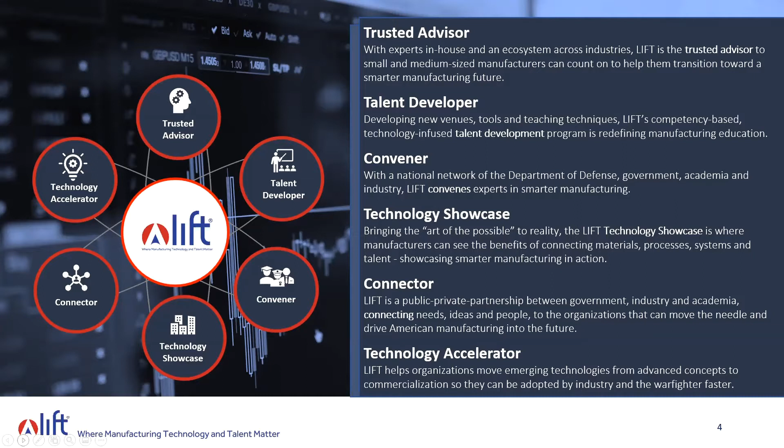We are a connector. Again, a public-private partnership between government, industry, and academia, really connecting the ideas, needs, and people to the right organization to move the needle. And finally, a technology accelerator, where we are moving emerging technologies from advanced concepts to commercialization to get them into the hands of industry and the warfighter.

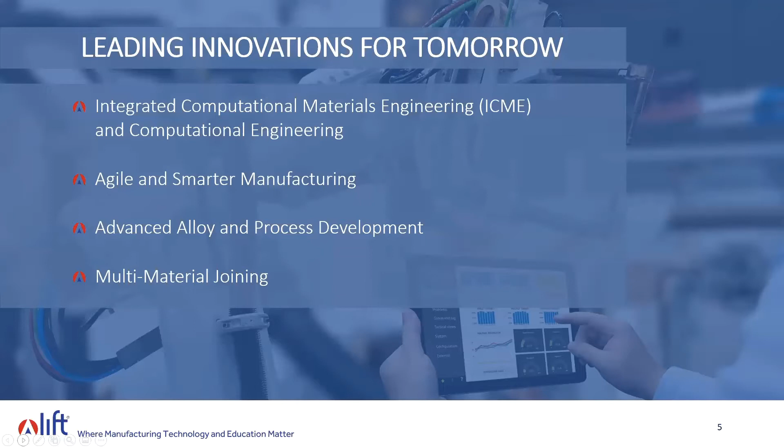A little bit deeper dive here. You can learn a little bit more about these on our website, or you can certainly reach out to us and ask any questions you might have. But really, again, it's connecting the physical to the digital as we're moving towards a smarter manufacturing future.

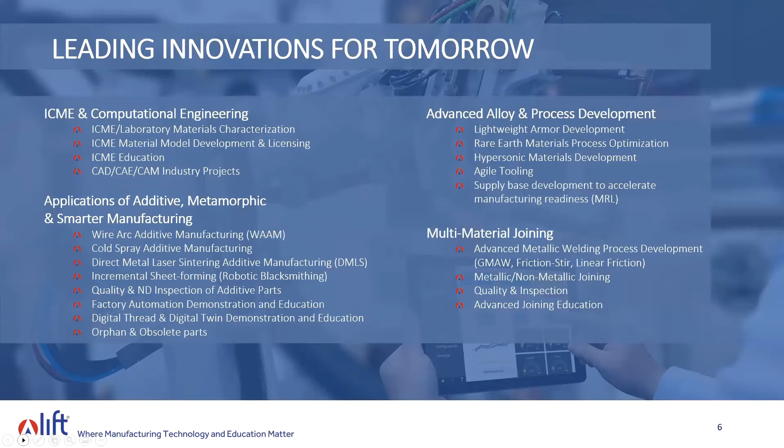The talent program, Learning Innovations for Tomorrow, has four basic pillars as well. It all starts with our Ignite Mastering Manufacturing curriculum that we developed. We teach that each and every day at the LIFT Learning Lab, where pre-pandemic we had 150 students a day going through there to learn about advanced manufacturing, learn about material science, and really expose them to the world of advanced manufacturing.

We also offer world-class certification programs for the mature student, folks that may need to learn a new skill, folks that may need to upskill to gain their next position in advanced manufacturing.

And finally, Operation Next is a program that is evolving as we speak. This was originally launched as a pilot down in Fort Campbell, Kentucky, to provide an opportunity for our servicemen and women as they leave the service. We wanted to provide them the opportunity to gain credentials in advanced manufacturing careers, so we offered them that six months before they left the service. Our goal was 101 down there. We knocked that out, and now we're expanding it across the country.

We just announced last week that the program is becoming available to the National Guard and Reserve here in Michigan and their spouses, so we're excited about having that opportunity. We're looking to announce a few more expansions, as the Department of Defense is funding that expansion to 9 additional bases across the country over the next couple of years. So we really think it's important to give back to our service members.

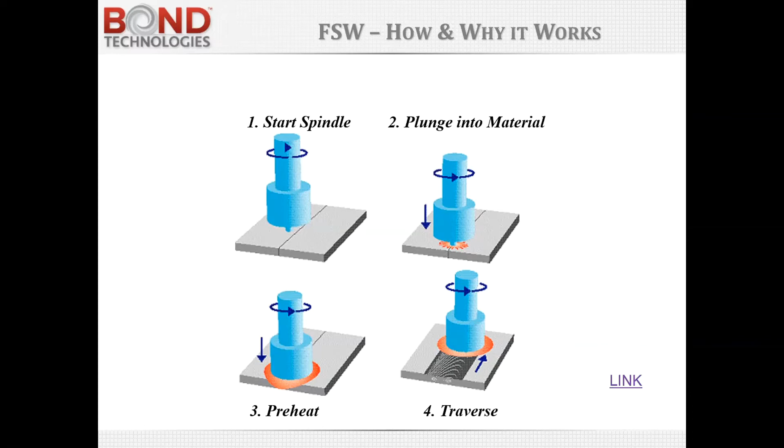But as opposed to melt phase arc welding, for example, the oxides become stirred into the material as opposed to inhibiting the weld process.

You can join a wide variety of alloys, although the predominant application for friction stir welding has been and will probably continue to be aluminum. The skill level of the operator, once the process is developed and put into production, is fairly low, so it does lend itself to production applications in manufacturing environments.

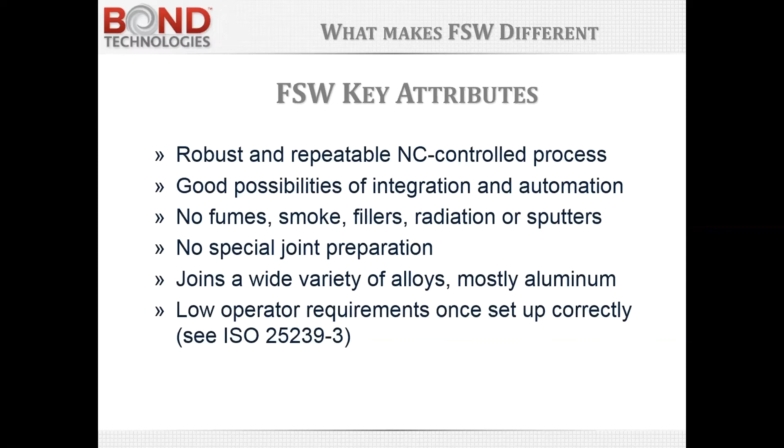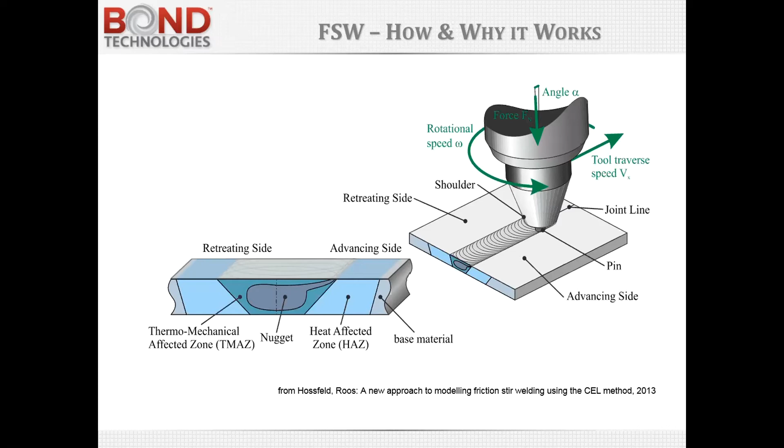The forge force is pushing down on the joint as it stirs. There's a rotational speed, there's a traverse speed, so speeds and feeds, much like metal cutting. The tool has a pin and a shoulder, and there's an advancing side and a retreating side, which is notable. So if you jump back to the picture on the lower left, you'll see a little bit of a tail on the advancing side, so it is not a perfectly symmetrical weld nugget.

The process parameters start with the pin tool geometry, and then rotational speed, traverse speed, and pin tool force are the three parameters that really affect the elevation of temperature, which then affects the flow stress of the material and results in the mixing of the material.

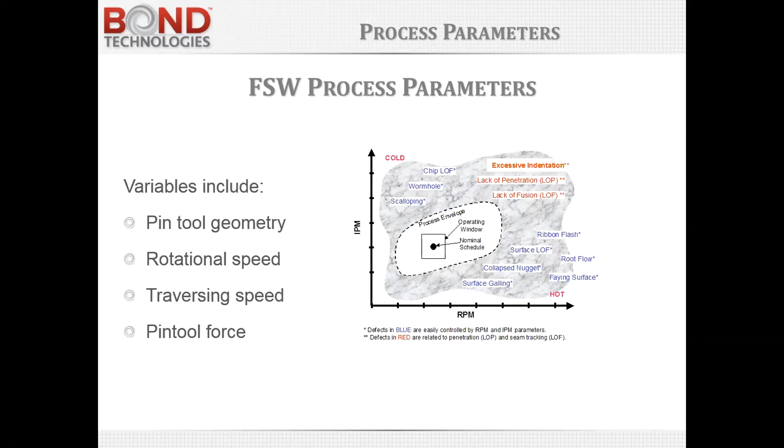One of the key aspects of friction stir welding is the use of forge force. You can do this in position control, in other words, plunging into the material, getting shoulder engagement, and traversing along the joint with a constant position. But if there's any variation in the material thickness or the tooling, it can result in a variation in the engagement of the shoulder. This will affect the weld process.

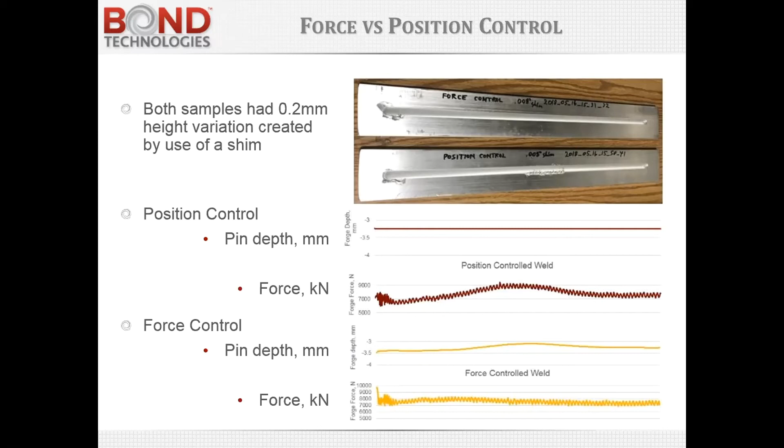So to do friction stir welding, it is advisable to use force control and use load sensors to be able to measure and close that loop.

Many kinds of materials, mostly metals, are welded with friction stir welding, but as I said before, it's typically used for aluminum. There are dissimilar materials that can be joined: aluminum 2000 series to 7000 series, for example, or aluminum to copper, aluminum to magnesium. I'll show you an example of aluminum to steel. Steel welding can be done.

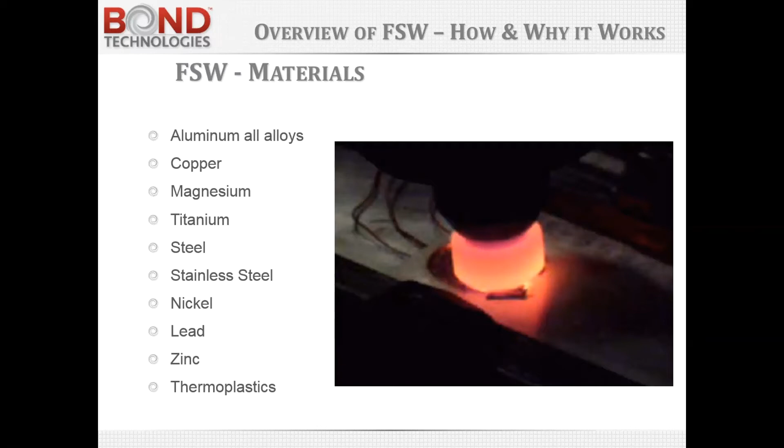Even people, the rumor has it, have welded chocolate together. I'd like to see that sometime.

Joint geometries are shown in this slide that are kind of popular. Some joints work better than others, but one of the things to be careful of is because of the high forge force and the high level of plasticity of the material, when a joint geometry is chosen, there needs to be very good support underneath.

Let's take a look, for example, at joint J, which is a kind of T-section. If the weld nugget were too large, you could imagine plasticized material causing a loss of containment underneath the flat horizontal plate. So in an example like this, one would use tooling to support that inside corner to avoid the plasticized material extruding down and out.

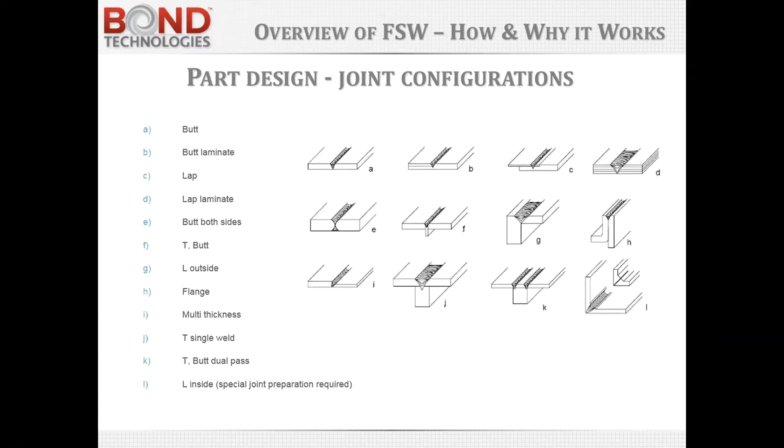The tool that does the work has a lot of characteristics and is actually somewhat complex, because it's not only forging the material down, but also inducing a horizontal and a vertical component. This big picture is of a conventional tool.

It's a one-piece tool, so the pin and the shoulder are made of the same material. Typically these are tool steels, starting with something like H13 and going up to some high nickel cobalt alloys like MP159 or the Nimonic series of materials. The pin tool takes a lot of abuse, so it has to be made of a very good material in order to last a long time.

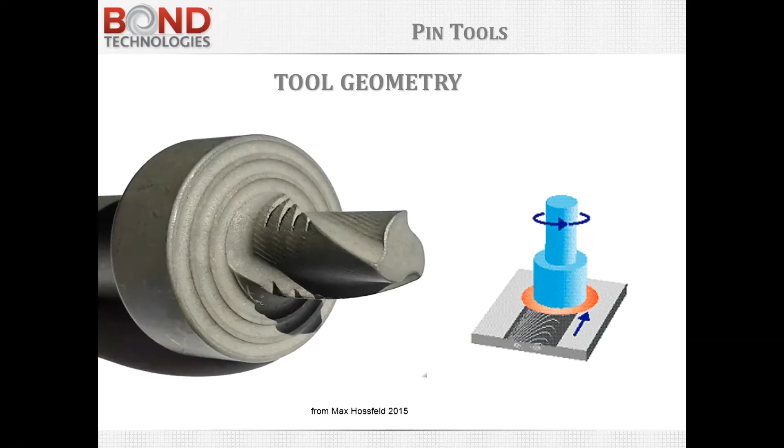Not only are some tools fixed pin, but there are some variations on the pin tool design. The fixed pin is shown to the left. These can come in a one-piece or a two-piece configuration. We make tools that have the pin as a separate component with a backing screw so that you can change the pin length depending on the material thickness.

The pins shown in the middle have two pieces, but the pin axis and the shoulder axis are actually separate. One benefit is that when you finish a weld, the pin can gradually retract over the last several millimeters to eliminate the exit hole that may be present with a fixed pin. The downside is it requires an additional axis, the equipment cost can go up, and it's a little specialized.

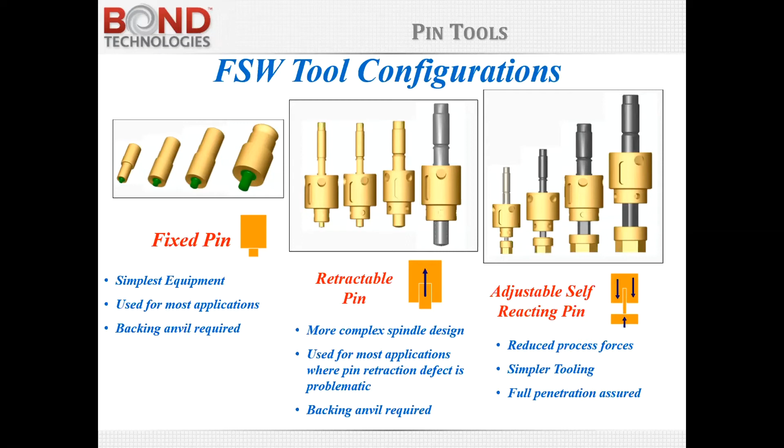But if you have an additional axis, you can also do the pin configuration on the right, which is an adjustable self-reacting pin. One of the big benefits of this pin geometry is that the forge force is reacted not by the tooling that supports the part as much as by the opposing shoulder. So for launch vehicles, for example, welding a large barrel where it's very difficult to introduce an internal mandrel, this has found its way into welding tanks for rocket ships.

This chart shows some typical aluminum alloys and the joint efficiency, which is the ratio of the stir welded joint strength to the parent metal. You'll notice that the 5083 O temper really doesn't lose much ultimate tensile strength after welding, because it starts at an O temper and winds up at an O temper. Others, like the 2000 series materials, have quite a range. And 6061 T6, a very common friction stir welding aluminum alloy, has a joint efficiency of around 67% or so.

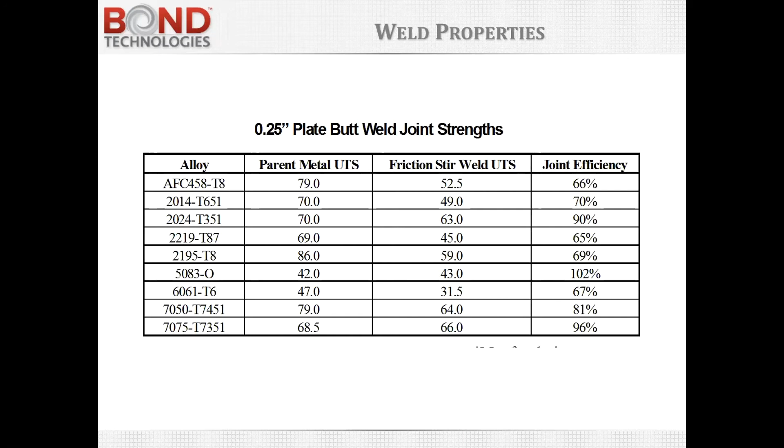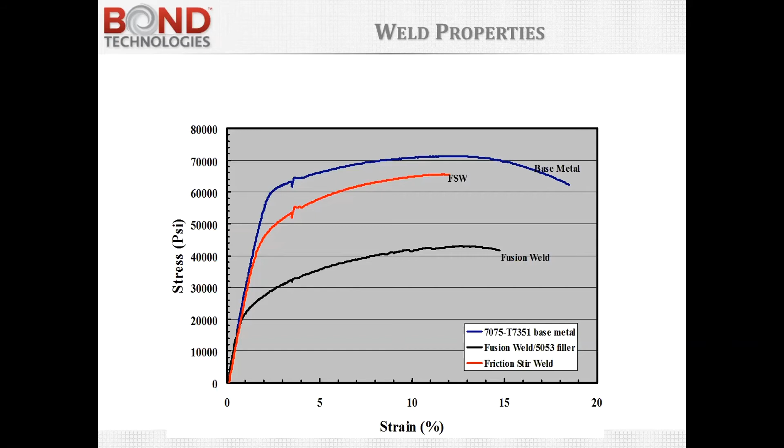This chart compares stress strain curves for fusion welding and friction stir welding for the base metal. In this example it's a 7000 series T7351 material. But in most cases, like 7075, a stir welded joint does have superior joint strength to a fusion welded joint. In fatigue, friction stir welding also demonstrates superior performance to other welding methods.

So the benefit from an application perspective is that, if the welded joint is the weakest link in the structure, friction stir welding gives you the ability to reduce the thickness of the material and allows you to lightweight the product.

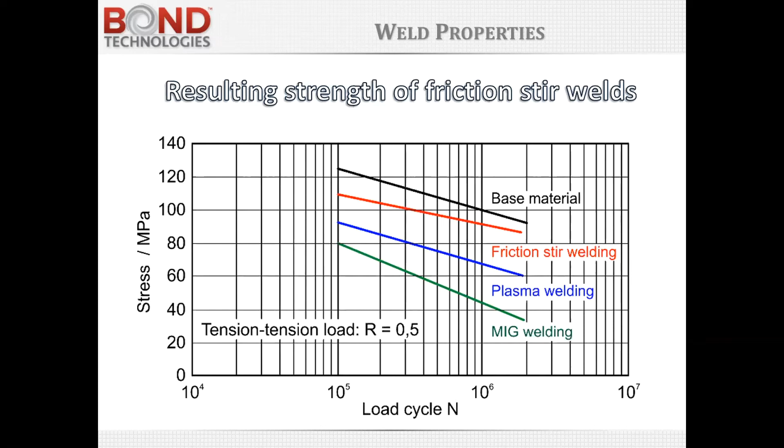This has found its way into all kinds of industries. Some have been around since the early days of friction stir welding, some are emerging. I'm going to go into a number of examples and comment on how stir welding has impacted these particular applications. But first, I want to give you an insight from Bond's perspective, the kind of inquiries we are receiving, to give you a feel of what activity is going on. This technology is still migrating from the research and development world into the production world. There's a tremendous amount of R&D activity still occurring in universities, national labs, and private industry. If you look at automotive and R&D, for example, that constitutes about half of the inquiries we currently receive.

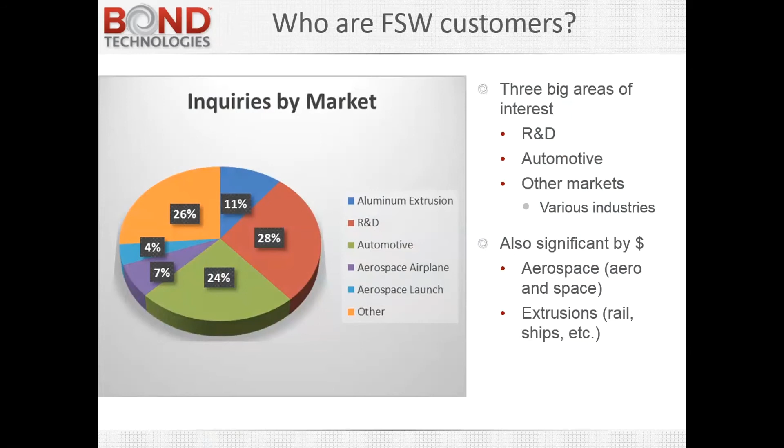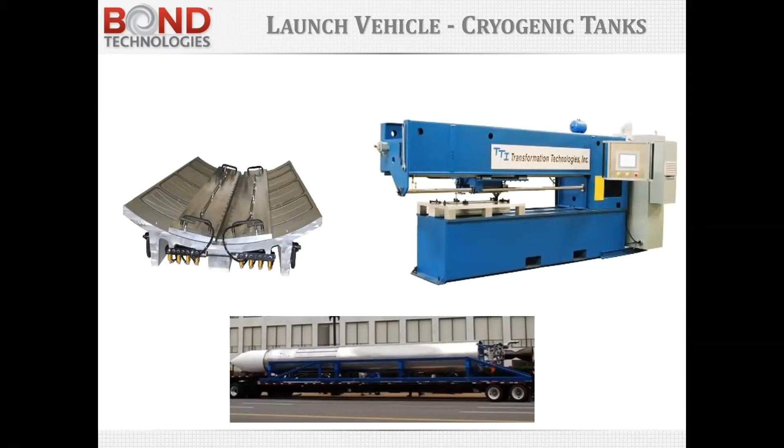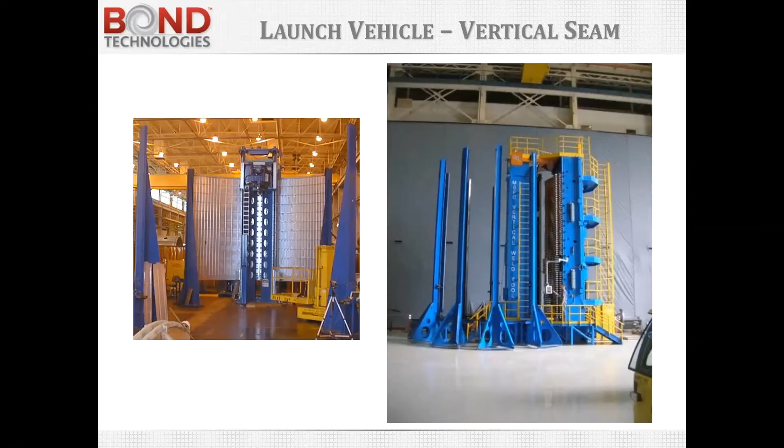Here's an example of a launch vehicle application. In this case it's a linear seam weld used to make a tank. This machine is at Marshall Space Flight Center making tanks. To the left you see the ortho grid or iso grid, they do both in tank sections. This takes segments and turns them into barrels.

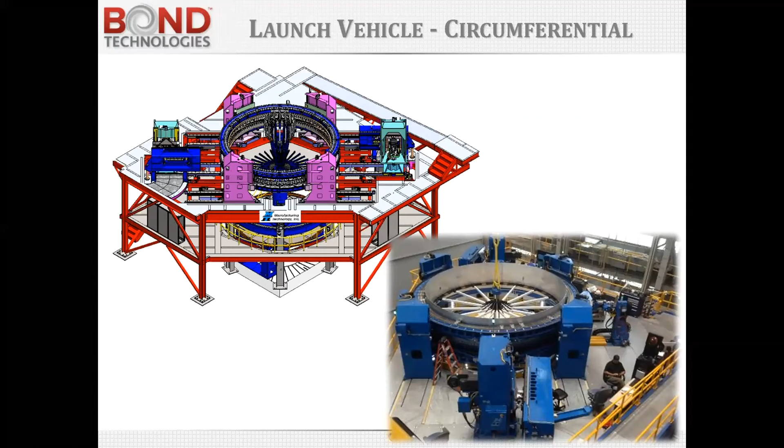Once you have a barrel, you can weld barrel to barrel or barrel to dome with a circumferential weld. This is a great application for that self-reacting tool that does not require an internal mandrel, although this machine does have an 18-foot diameter umbrella, essentially, that expands to support the weld so that they can also do conventional welding.

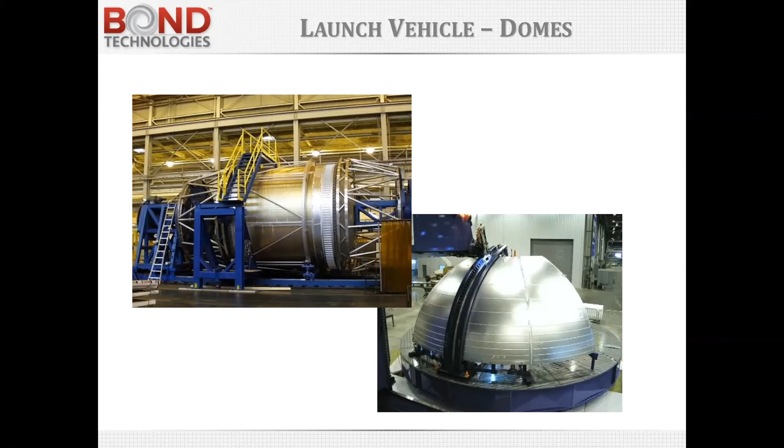One thing about the rocket ship people is they realized early on that aluminum lithium alloys have a great strength to weight ratio, making them great candidates for rockets, but they're also very difficult to weld using conventional methods. So they discovered friction stir welding was a really good applicable technology for making rocket tanks. As a result, a tremendous amount of innovation and R&D has occurred by NASA, SpaceX, Boeing, ULA, and overseas by ESA and others who have broadly adopted friction stir welding.

One of the early adopters was Eclipse Aviation for construction of fuselages without rivets. If you get on an airplane these days, there's a lot of rivets. Interestingly, in the airplane side of the aerospace industry, it's very difficult to change a manufacturing process to adopt a new technology. So where you see friction stir welding finding its way into the airplane business is primarily on new designs.

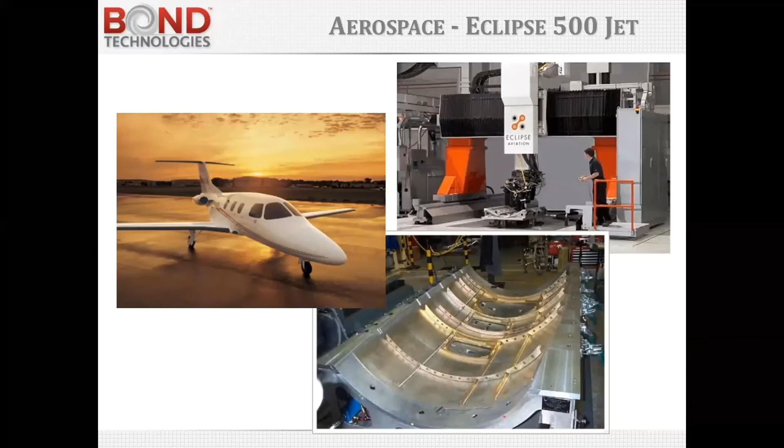Shipbuilding was another early adopter. The ability to join extrusions together to form ship decks is a very common application. One challenge is managing the straightness of these joints, because if the stir weld gets off joint, you're going to have a very weak structure. So keeping these straight, clamping them properly, and tracking the seam to follow properly are some of the technologies developed to address long panel extrusions, including in the shipbuilding industry.

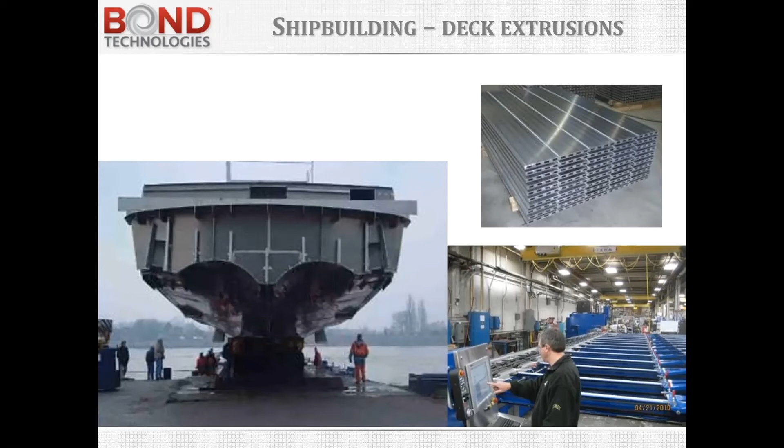Steel has also been done. One challenge with steel that is seeing some traction now is the development of a robust pin tool that can live for a long time in steel - it's a pretty tough environment. Typically, the tools used for welding steel are polycrystalline cubic boron nitride, PCBN, or tungsten alloys like tungsten rhenium or lanthanated tungsten. Pretty expensive stuff, so minimizing the wear characteristics of those tools is an area of continued development in friction stir welding of steel.

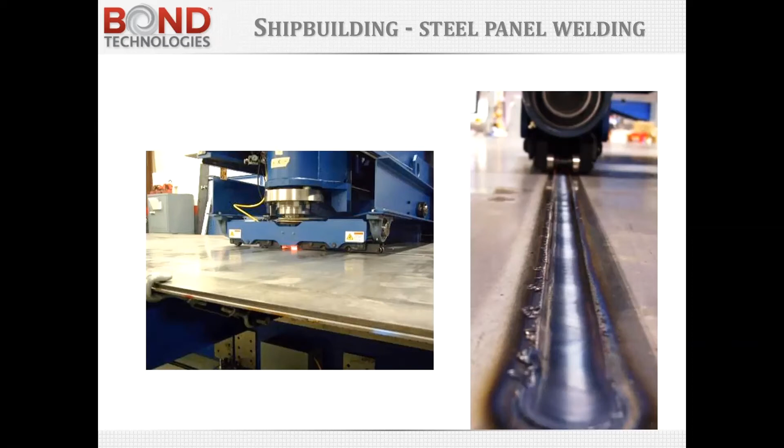You can use robots for friction stir welding, and for thinner gauge materials it's a suitable application. Robots are basically a commodity - you can buy them and they're treated as a component. So you put a spindle on a robot and you can do friction stir welding. However, even with the advent of deflection compensation at each joint, robots still struggle to be stiff enough dynamically. Statically you can compensate if going in a straight line, but there are challenges in getting a robot stiff enough. So there are production applications where robots are used with an FSW spindle, but it's primarily for thinner gauge materials.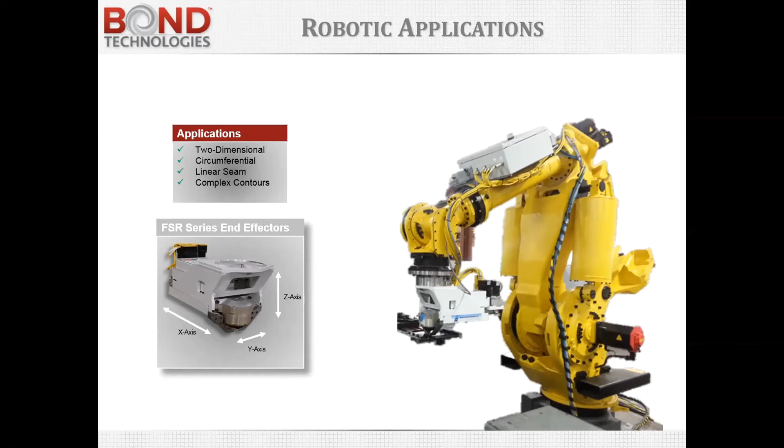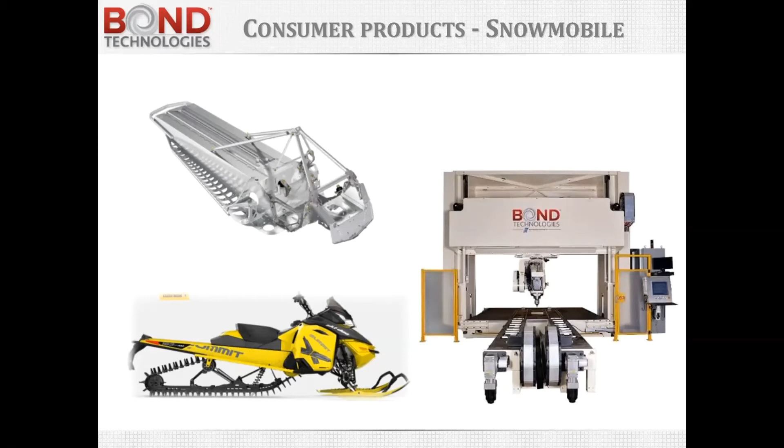This is an interesting application that uses a multi-axis machine for complex contours. One challenge of complex contours is finding a path that manages the force and accommodates variability in machine deflection as it goes through the weld path. But this application allowed the manufacturer of this snowmobile to reduce the weight, reduce the center of gravity, and increase the reliability of the component they welded. So they looked at friction stir welding not just as a cost savings and substitute for a traditional method, but as an opportunity to improve their product design.

I think this is a cool application - it's a connector for a power transmission manufacturer. A couple of interesting things about this: one is that it did use a retractable pin to avoid an extraction defect in the weld. The other is that one of the quality control metrics for assuring the weld was done properly is the measurement of the resistance across the weld joint in micro ohms.

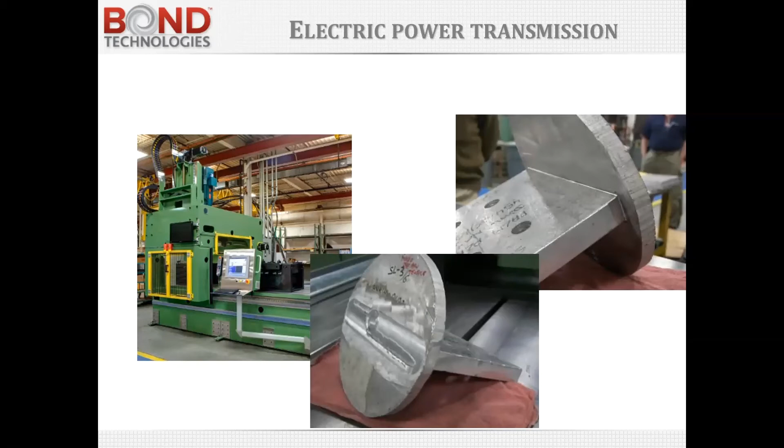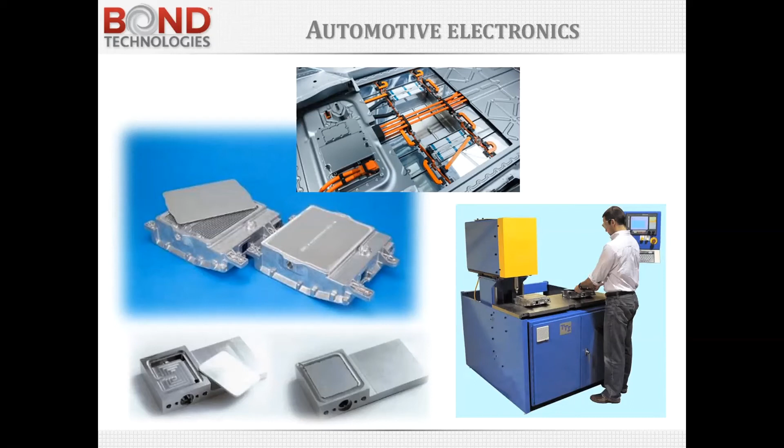This is a segment that is growing rapidly - automotive electronics, including both battery trays as well as power control modules. Typically it's a box with a cover. The cover seals a chamber that has coolant going through it to cool off the electronics. But there are many, many applications of this emerging in automotive.

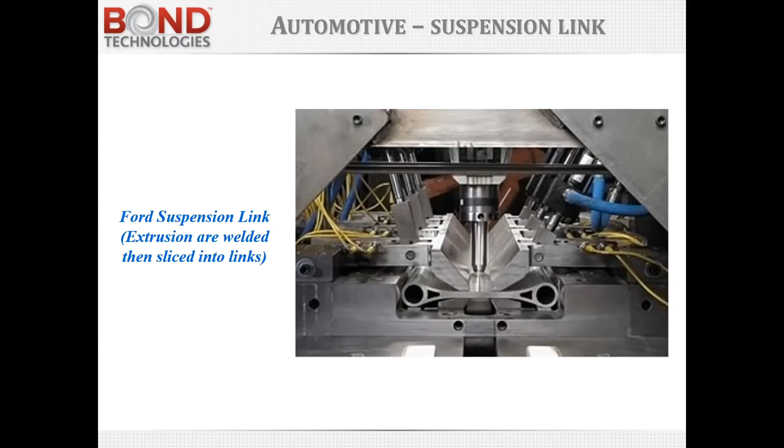Another interesting automotive application is a great example of design for manufacturability. These links are welded together symmetrically, and it's an extrusion, so it's long, and then they're sliced to form suspension links - sliced like bologna into short sections.

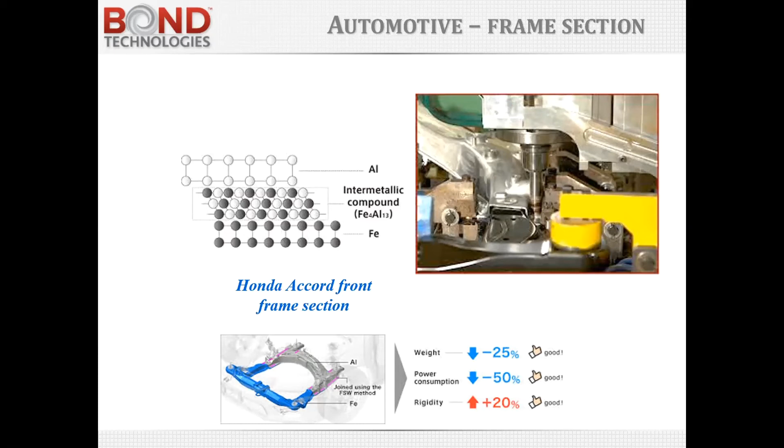Honda did some friction stir welding of the front K-member on the Honda Accord to join aluminum to steel. One of the things that happens when you join aluminum to steel is that intermetallic compounds can be formed. You may be scratching your head thinking, wait a minute, the melt point isn't reached when you do friction stir welding, yet the melt point of aluminum and the melt point of iron are drastically different. What happens here is that the aluminum gets pretty hot, and the steel receives a much smaller fraction of the heat input, from the standpoint of where the tool is positioned. So the pin tool is mostly on the aluminum side. But you do get these intermetallic compounds if the temperature is elevated too much, and these are fairly large molecules that can be pretty brittle. So the way Honda achieved success with this application, and the way others are achieving success with joining aluminum to steel, is to seek a cold or colder region of the process window to keep overall temperatures low and inhibit the formation of the intermetallic compounds.

If electric vehicles are a skateboard configuration, as shown here, battery trays are a great candidate for friction stir welding. One of the benefits of stir welding for battery trays is the replacement of other joining technologies for the covers, like gluing and screwing, or using gaskets and bolts. So it reduces weight, improves reliability, and there's a number of benefits. We're seeing the electric and hybrid vehicle market become very active in friction stir welding. It's an exciting segment to be a part of.

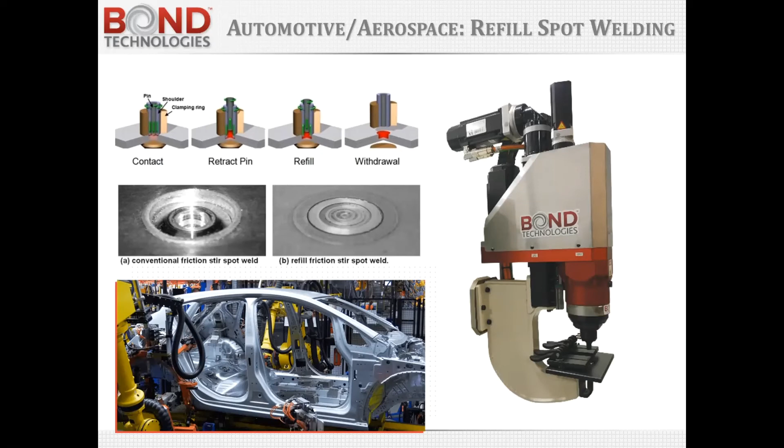Here's a little demo of how this works. The clamp ring comes down, the shoulder and the probe make contact, the shoulder goes into the part, the probe comes up, the probe goes down, the shoulder comes up, and then it removes itself. All this happens, and it's already competitive with resistance spot welding and self-piercing rivets.

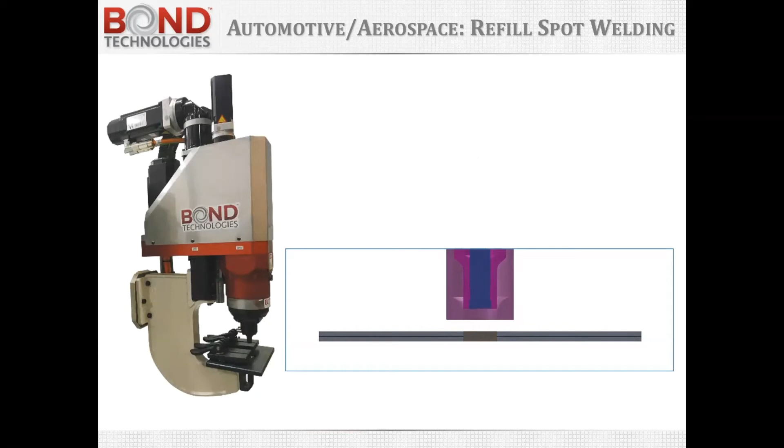As I said before, there's a lot of activity going on in the R&D world, and what's exciting for us is to be able to participate with some of our research partners and then migrate these developing technologies into the production environment, where it actually benefits companies and helps the economy.

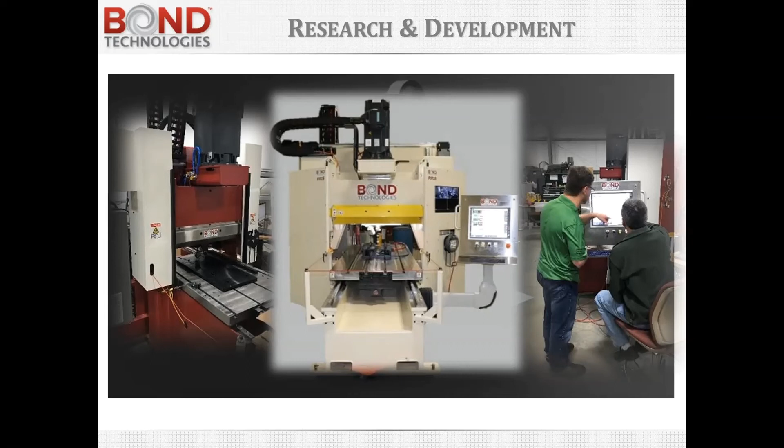So I want to talk about some of the trends emerging from R&D and going into the production world. There's continued activity with dissimilar alloys and high strength materials, as the pin tools for steel and high temperature alloys get better. Applications for friction stir welding of steels and others become more and more prevalent. Metal matrix composites are being developed. Aluminum to steel, as I mentioned, and aluminum to magnesium is another opportunity. So there's a lot going on in the materials world, both the materials being joined as well as the materials that comprise the pin tools doing the work.

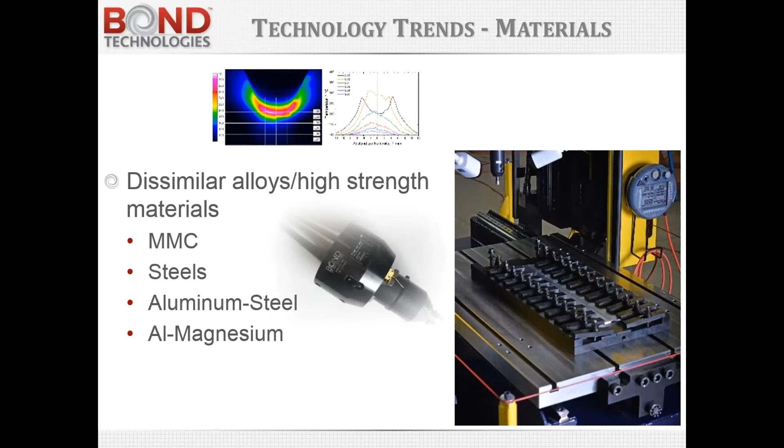One of the benefits of this machine is that it allows the next extrusion to be welded to be loaded and put in place, so it's ready to drop in once the first joint is done.

Prior to this machine, the way you would weld long panel extrusions is to load up two extrusions, butt them together, clamp them, and then do the weld. Once done, unclamp, index them out, load the next extrusion, line it up, clamp it, and begin the next weld. In this application, historically, setup time was enormous - the setup time to actual weld time was many multiples. So what we've been able to do with this machine, and I think this is a trend, is develop material handling technology that allows the welder to stay busy most of the time.

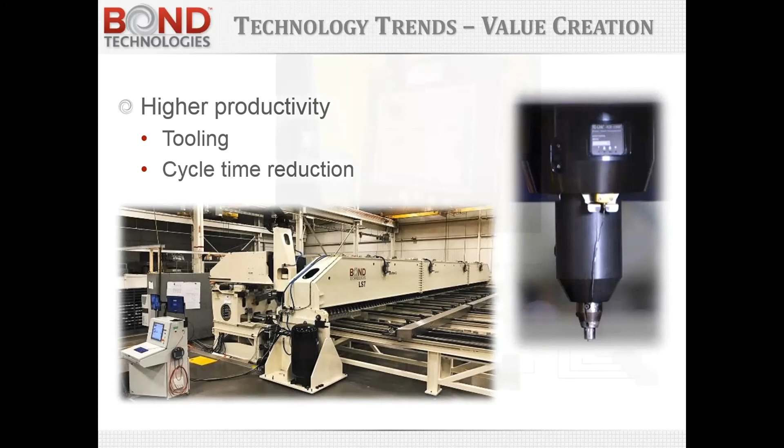We do believe that a lot of the technology that is going to benefit industry in the future with friction stir welding has to do with controls. In-process quality is a very important aspect of friction stir welding.

The machines that we build, and the machines people use in general for friction stir welding, gather gobs of data - forces, torques, positions, depth of the tool. All are important parameters and lend themselves to process control. So there's traditional statistical process control that can be implemented, such as looking at the forge force to ensure it maintains some established range within the process window, or looking at the depth of the tool to make sure it doesn't plunge too deeply for some reason. The classical gathering of data and establishing boundaries for warnings and alarms is a more traditional but still very important part of making FSW successful in production.

Broken tool detection is another example. If you break a tool, you'll see a spike in the force, and you'll see a dramatic reduction in the traverse force. So there's ways to determine whether you've broken a tool or not.